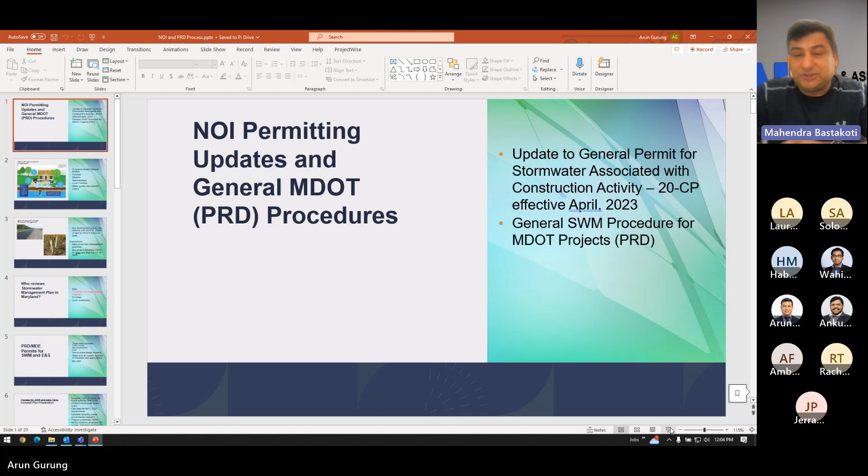This presentation is for the water resources NOI permitting. They have a new process launched. So we ourselves in WRE and also related other task force need to be aware of this. That's why we have this session. So Ankur and Arun, go ahead and start the presentation, please.

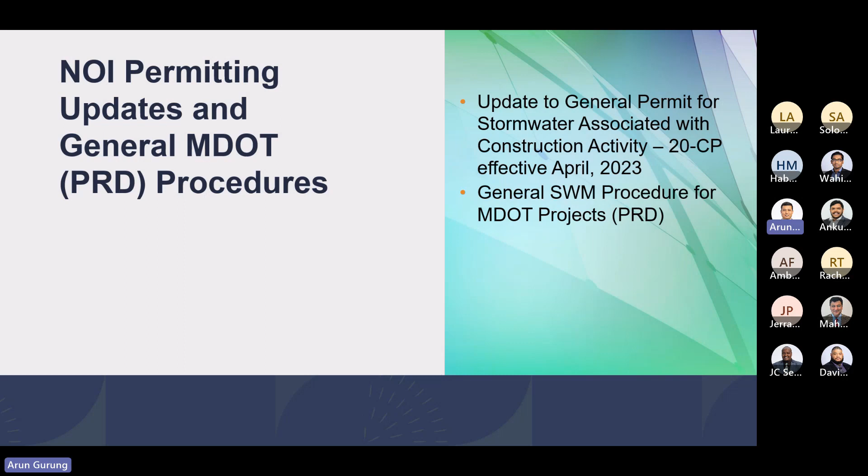So we are going to go over it, and then we'll be also going over some of the general stormwater management procedure, specifically for the MDOT projects, talking about PRD and HHD processes. We try to make it as simple as possible, so that we don't go too deep into the technical details, so that it will be easy for everybody to understand. So let's begin the training. Feel free to jump in whenever you want, or if you think I missed anything. Yeah, just chime in.

So let's say stormwater. So why do we need stormwater management? Why can't we just let everything fall to a river or lake? That's a very easy question, because as you develop a site, you're adding a lot of impervious area. And with the impervious area, there are a lot of pollutants that come with it. For example, a roadway project. When you add a roadway, what happens? There are vehicles that travel along that roadway which have contaminants like an oil leak or your gasoline, even the rubber from the tires of the vehicle. Those are all kinds of contaminants.

When you develop a site that deals with a lot of chemicals, then there will be chemical contaminants that will be coming out from that site. A typical example would be a dyeing industry where you dye clothes, or any manufacturing industry such as the pesticide manufacturing industry. So those are all pollutants that eventually run off to our watershed and wreak havoc.

Like if you have heard about algae bloom, which I think is a very serious problem in Chesapeake Bay, that's all due to the fertilizers that are being run off from the agricultural field, which end up in our storm drain system and eventually wash out to the bay, where it's feeding all the algae, and with all that nutrients added to it, the algae bloom, it's creating a lack of oxygen in the bay area that's killing all the native fish and species.

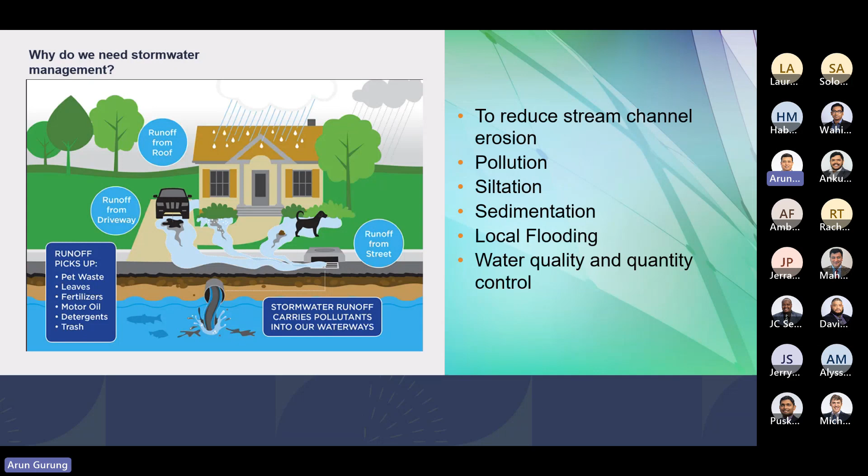So those are some typical examples why we need stormwater management. And with every new development, I think now pretty much all the jurisdictions are pushing for this kind of management. So when do we need to provide stormwater management? Generally speaking, any kind of land development that has disturbance over 5,000 square feet requires stormwater management treatment.

Not all developments are classified as disturbance. For example, if you are ripping out the top layer of your road, a mill and overlay typically, you're only ripping out the top 2 inches of the road and putting the same surface back. So that's typically not considered a disturbance, unless you do a full depth pavement where you're disturbing the subbase; then that would be considered a limit of disturbance.

So whenever the limit of disturbance gets above 5,000 square feet, or in terms of erosion sediment control, whenever you're removing 100 cubic yards of dirt from your site, then you are supposed to provide some sort of management or some sort of erosion sediment control. But there are exclusions.

For example, agricultural activity: when you're plowing your fields to grow crops, you are disturbing the earth, but that's not considered for stormwater management. Or certain activities in agricultural sectors, such as building a pond to irrigate crops on your farm, I think that activity is also exempted from the stormwater management treatment requirements. Anything other than that, most of the time, we do have to provide stormwater management.

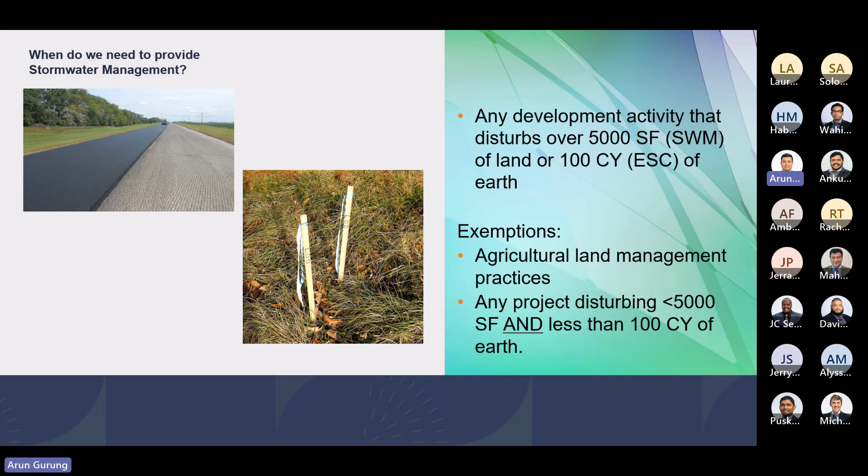So in Maryland, your stormwater management plans and erosion sediment control plans are generally reviewed by these four entities. Federal projects or any projects that deal with the critical areas or floodplains environmental impacts will be reviewed by MDE. All our state highway projects, I believe, are mostly reviewed by PRD and HHD. PRD reviews mostly the stormwater management and erosion sediment control, and HHD is more concerned about the drainage part of that development.

There are counties who enforce their own stormwater management guidelines. So if it's not an SHA project, or if it's a project jointly done by the county and SHA, then such projects will most probably be reviewed by both, mostly counties. And then there are cities which have their own guidelines, for example, the city of Rockville in Montgomery County, the city of Gaithersburg, and I think the city of Kensington or Takoma Park also have their own review department, but I may be wrong in the case of Takoma Park. So they also review their own stormwater management plans.

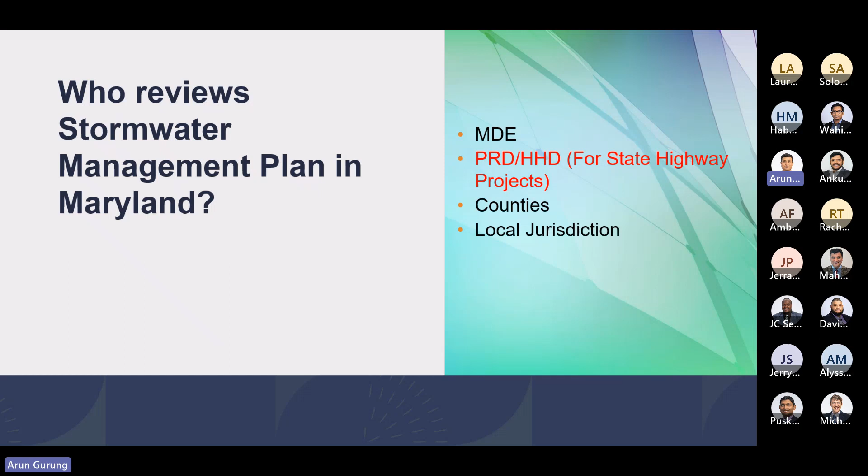And for today's presentation, we are going to focus on the HHD and PRD process. Some of you may be well aware of this, but for some, this might be a new thing. PRD is divided into a three-step process. Whenever you get a project and start working on it, the project goes through a concept phase where you get together with the project manager at the DOT and discuss the project, what improvements you're doing,

and based on that, you do a preliminary design investigation of the project where you can provide some stormwater management facilities. You collect information about the utilities and other constraints that might impact your design. Also, you might want to find out if there is any newer version of the application form, because I find that it gets updated from time to time. So any checklist that might be relevant to your projects, you might want to get hold of those too.

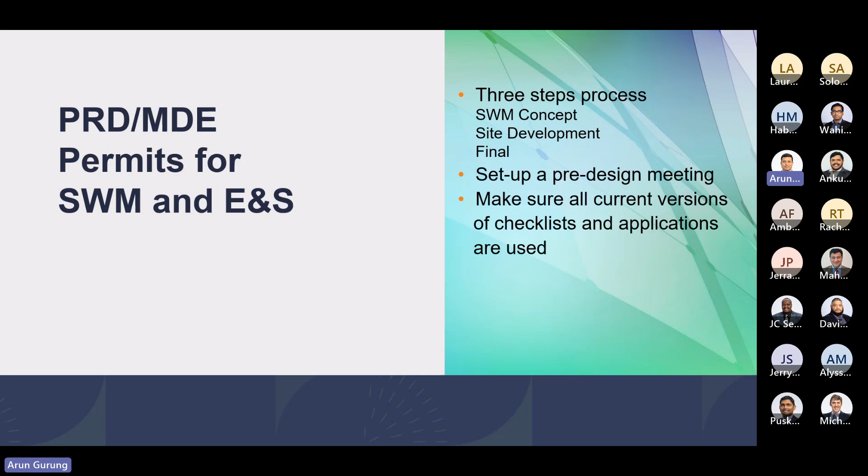So in concept plan preparation, in our water resource department, we go through these steps. First of all, you look at your project and you look at the limit of disturbance. And based on your limit of disturbance, you have to identify the point of investigation. If it's a concentrated flow that's leaving your site, which is generally SHA right of way or LOD, or if it's a sheet flow that's leaving your site, you would consider that as a line of investigation.

So you identify those points, and depending on your project, it might be only a few of them, or if it's a linear project, you generally end up with a lot of POIs and LOIs. And one thing that we need to make sure is your LOI or your POI includes the entire LOD. No LODs left without being analyzed at the end of the project.

Then based on that, for each POI and LOI, you calculate your IART, which stands for impervious area requiring treatment. Now, that is based on the category of your project, and we're gonna touch on that later, how a project is categorized. So your IART depends on if it's a new development or a redevelopment. It could also be combined development. So that will determine how much IART you would have in that project. And you would also calculate your ESDv based on the IART within that LOD.

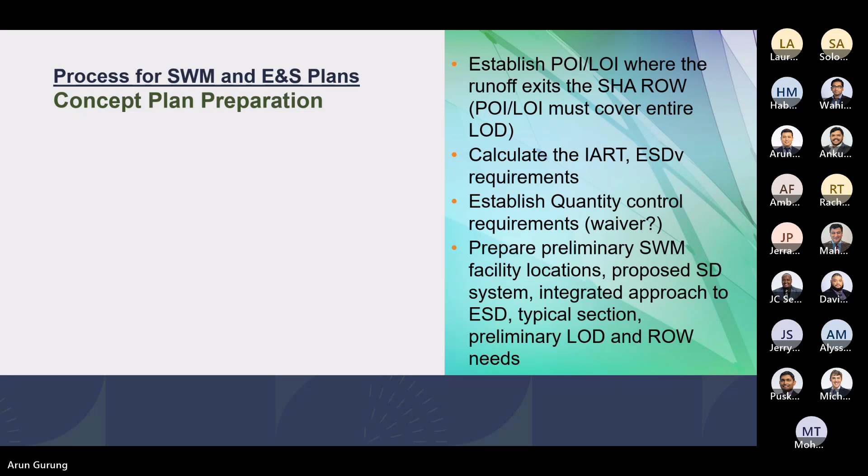And a few documents that we provide for the concept plan include the environmental resources inventory mapping, where we identify features in the site that are environmentally sensitive. Those could be forested areas or wetlands, your streams, steep slopes, your karst topography if you're working in Frederick or Washington County, any floodplains, tidal wetlands. Those kinds of features have to be identified, and that's generally shown in our environmental resources map.

Also, determine if any development in your project needs to be reviewed by MDE, because there's an MDE Pond 378 code that requires you to look at certain things in a stormwater management facility. If it exceeds certain things, then it needs to go through that review process. So you need to determine if your site has to go through it, because that's a lengthy process.

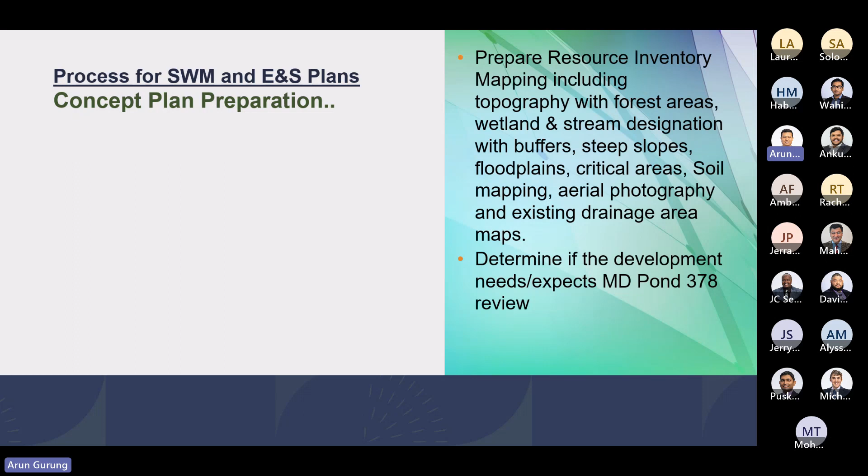So it's best if it's identified during the initial stage of your project. And we include all the drainage area maps, so that includes your existing condition, your proposed condition, all the runoff, that's pre and post runoff, those are computed, and all your ESD requirement, like how much is required, how much you have provided in your project, how much IART is required, and how much IART you have provided.

So those are all gathered, calculated, and then we compile a report based on our computations and our findings. We also put together a concept plan that shows the preliminary location of these facilities. And there are other forms and waivers, for example, if there's a POI and you're not meeting the stormwater management requirement, the IART or ESD in that POI, then you have two options, basically.

So you can either provide the same amount of treatment in some other POI, but there are also two parts to that. For your water quality, which is your first flush, they say it's the first 1 inch of rainfall that has the most pollutant, it has to be provided within the same POI, and the remaining up to the 1-year, 24-hour rainfall, which for most of the county is 2.6 inches, can be provided within the same watershed, but it doesn't have to be within the same POI.

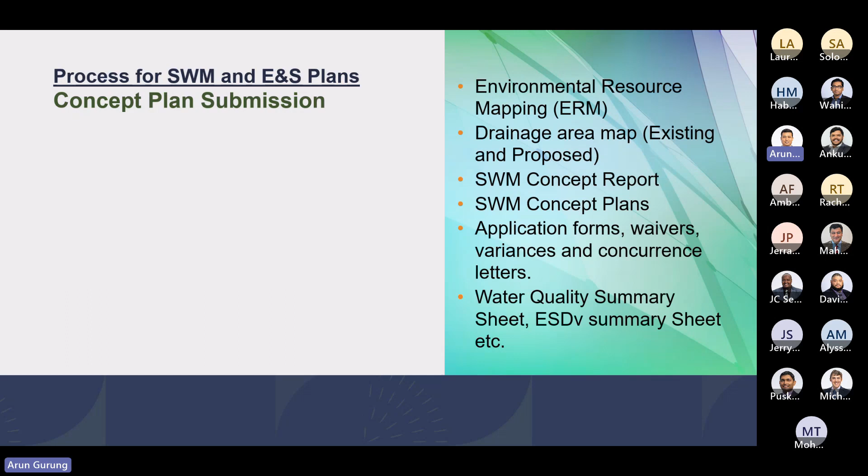Also, there are other sheets like the ESD summary sheet. I didn't even list a few of them, because if your impervious area gets transferred between POIs, then there is another spreadsheet that we fill out. So those kinds of documentation we include in our report, and that's the conceptual plan that we submit. Once the concept plan is submitted, it goes through review by PRD and HHD. Usually PRD reviews the stormwater management and erosion sediment control portion, and HHD reviews the drainage part of it.

Once we address all those comments and the concept is approved, then we go to the site development phase. In this phase, we generally address any remaining comments from the concept phase, and if there are any conditions in the approval letter, then we address those conditions. We also develop the full design detail. For example, if you're putting in microbioretention, then we provide all the typical sections, profiles, all the inverts. If you're putting in a bioswale, then the profile of the bioswale. So we try to provide everything in detail during the site development phase.

If there are any concurrence letters or variances that need to be signed by the county or HHD, then those need to be signed. In concept, we generally only include the general notes and a few typical details for the erosion sediment control plan. But during the site development phase, we do the full design of the E&S plan, so that also gets reviewed. If there is any MOT, then our highway team develops MOT plans for that. And if your project has to go through the MDE pond review, then this is the stage where we get those done.

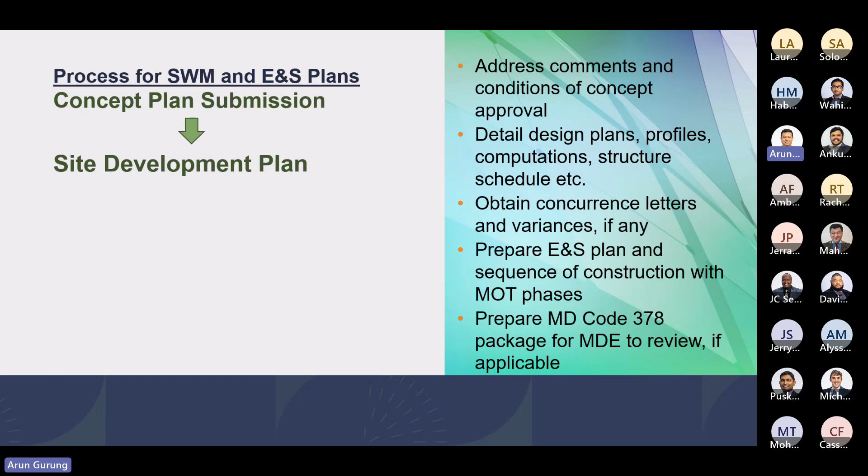So once the site development phase is completed, then basically the only thing you are doing is addressing the last remaining comments that PRD or HHD may have, and then you provide them with all the construction tables, schedules, any specifications or cost estimates.

Your project might also go through the constructability review from the SHA department. So they might also have some comments, so you would address those comments during this stage. And any dam safety or pond review comments that MDE might have, you'd have to address by this stage. Any signatures that are required on the plans, certifications, concurrence letters, water quality summary sheet, those have to be completed before your final plan can be approved.

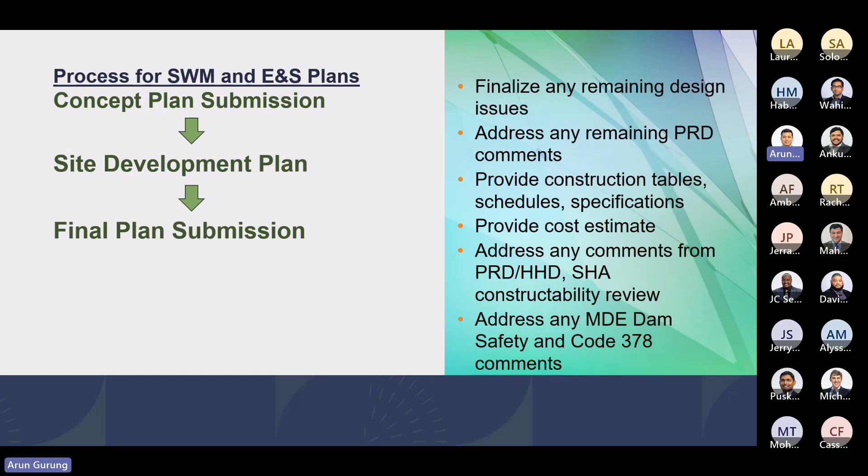So any questions so far on the stormwater management before we begin the NOI?

I just want to clarify about the size of the disturbance. Yes, go ahead. 5,000 square feet. Can you hear him? Solomon, I think your microphone's really low. Okay. How about now? Can you hear me? Yeah, it's better now. Go ahead.

Yeah, I was trying to clarify. I don't know about PRD, but at MDE, if the size of the LOD is greater than 5,000 square feet, both stormwater management and erosion and sediment control are required. If it is less than 5,000, the stormwater management requirement automatically disappears, but for erosion and sediment control, 100 cubic yards is the threshold. So is that the same thing for PRD? Yeah, that is the same thing for PRD, Solomon.

And also, I'd like to quickly input here: what is the difference between SHA review and MDE review? They are similar because all state and federal funded projects need to be reviewed by the state agency, which is MDE. But SHA worked out with MDE to get a general permit. There is an agreement between SHA and MDE for the general permit so that SHA can review their own projects, but they need to be documented and submitted to MDE. A yearly audit from MDE happens on those projects.

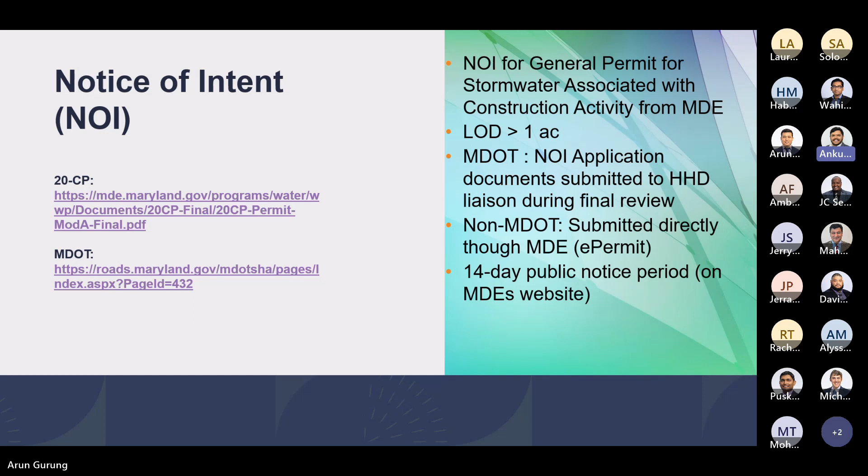You can go to the next slide.

So one of the big changes with the latest law, the 20 CP requirements, is this stormwater pollution prevention plan. So essentially all that is a document. It's a Word document template they have. MDE has a long version of it that includes every stipulation of any type of project. I think it's available on MDE's website. If someone needs it, I can link you to it, but it's something like 50 pages long.

Whereas MDOT just released, as of middle of June I think, their own template version, which is much shorter, I think just 6 pages or so. And it goes hand in hand with the new E&S general note sheets that MDOT also published. If you read through it, a lot of those notes are related to environmental things. So instead of having to repeat the information within this SWPPP on every project, they incorporated those notes into the E&S general notes. That's what allowed them to reduce that document from like 50 pages to 7 pages.

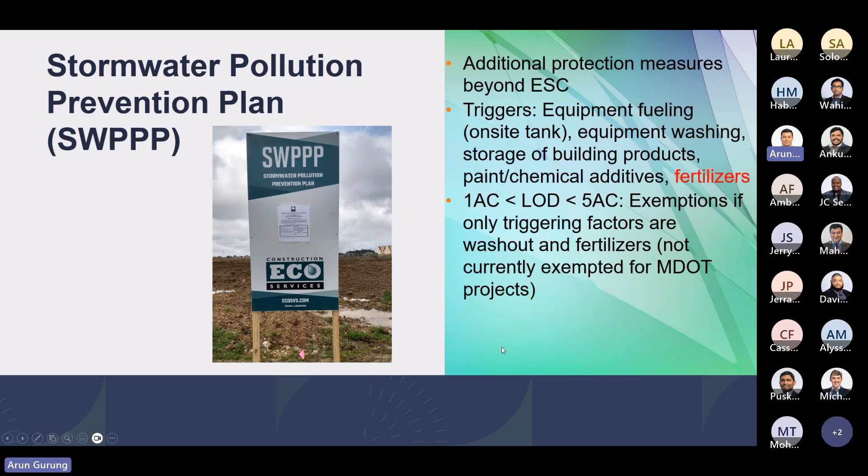No. In that case, we're gonna go through some slides where we will talk about some general terms used in stormwater management. Most people who deal with stormwater management know these terms, but they might be new for some folks. So we're gonna go over it, and hopefully by the end of this training you'd have some idea about it. Like I previously mentioned, when you start a project, your project is typically categorized into 3 categories: redevelopment, new development, and a combination of both.

So what triggers that is, if you have a site and you have a LOD, and if the existing impervious area in that LOD is greater than 40%, and you're not increasing the net impervious area at the end of your project, then such a project is typically called redevelopment.

Whereas any development that has an existing impervious area equal to or less than 40% is categorized under new development. And the combination is when you have existing impervious area that's greater than 40%, but at the same time you're increasing the net impervious area at the end of the project; then that kind of project is categorized under combined redevelopment and new development.

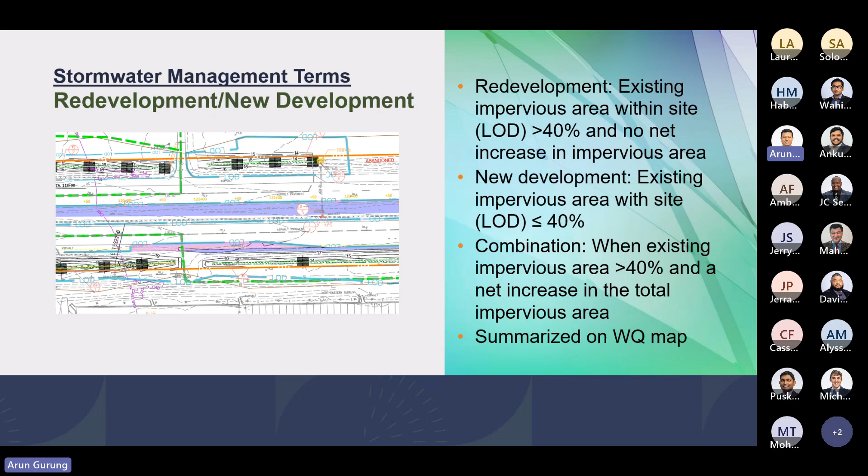And also the general spreadsheet that we use to calculate our stormwater management will have your new impervious area and existing impervious area. So this is how we generally categorize our development, and based on that, they have different requirements for stormwater management.

For example, if you're developing a site that can be categorized under redevelopment, then you can satisfy the stormwater management by reducing your existing impervious area by 50%. If you're removing an old parking lot, let's say, and putting just a playground area without any impervious surface, you're basically removing 50%, just for an example, then you have satisfied your stormwater management. Or you can provide treatment for 50% of the existing impervious area within that LOD. If you provide that 50% treatment, then you have satisfied the stormwater management for that development.

For any new development... Arun, for that 50%, you need only to treat one inch, right? Yes. Okay. So when we say water quality, we are talking about the 1-inch PE. Anything above that, up to 2.6 inches, that's CPV. We can touch base on that later, but I'm talking about the water quality here.

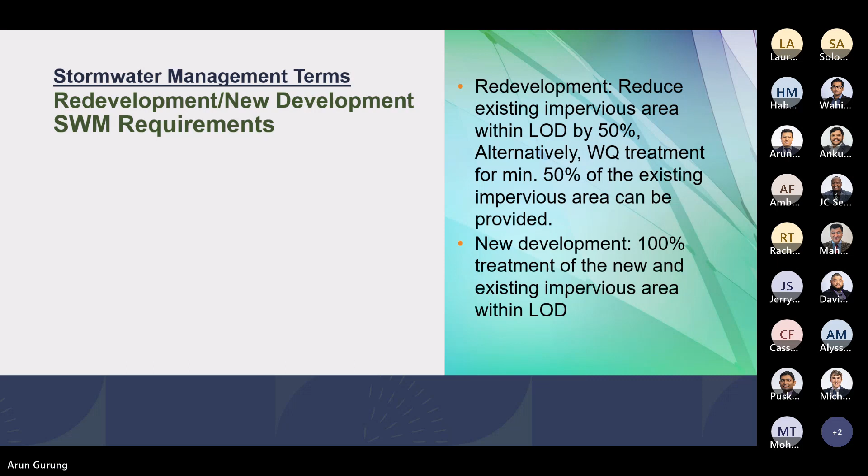A few other things that come up during our discussion, which might be confusing, is water quality volume. What is the water quality volume? This verbiage I took directly from the SHA manual. It says it's 90% of the annual runoff volume at the project site, the 90% of your 1-year, 24-hour rainfall event, which for Montgomery County, I think, is 2.6 inches. I think for PG County it's 2.7 inches.

But the first 1 inch of that rainfall is considered the water quality volume, because that's the water that will contain the most pollutants, and that's why it needs to be treated with a stormwater management facility. It's recommended that those are treated by ESD facilities if possible. So that's called the water quality. Anything above that, up to 2.6 or 2.7 inches, is called the channel protection volume.

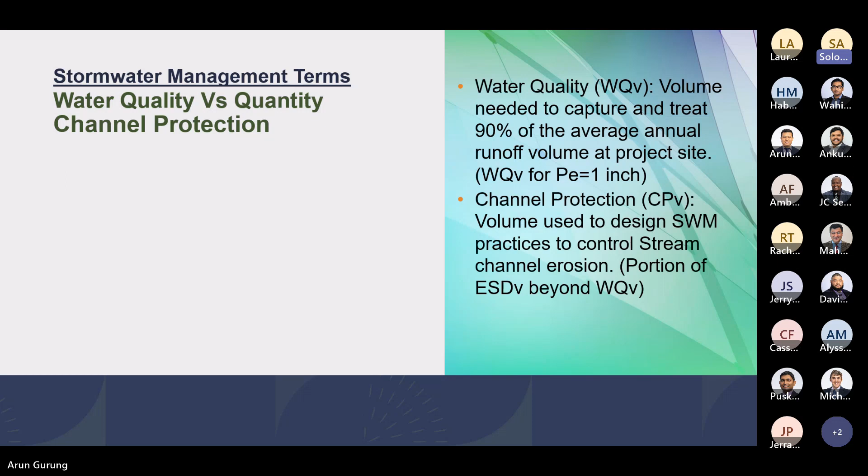Another term that gets thrown around all the time is water quantity control. So what's water quantity control? This has to do with the historical flooding issue that I mentioned before. Some jurisdictions have very serious issues with flooding, whereas some rural areas might not. So different jurisdictions have different requirements. As you go into the urban areas, they are having more and more problems with flooding, so they might have more stringent flood control requirements.

They might tell you to control your 2-year or 10-year, and obviously 100-year. But in some areas, like Garrett County or Washington County, they might only tell you to control your 100-year and sometimes 10-year. So those are usually based on where your site is located and the criteria set by that jurisdiction.

And the way we do the quantity control: once you have your ESD facilities, what you're basically doing is you're trying to mimic the natural, or you're trying to bring your site back to its original condition, like woods in good condition. That's what they say. So what you're trying to do here is provide enough opportunity for the water to get treated by infiltration before it runs down to the stream and causes problems later on.

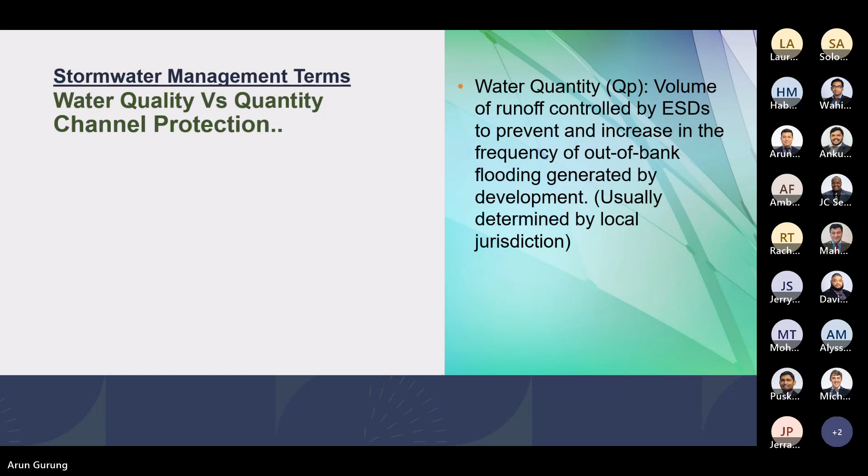You want to go through this, Ankur?

Yeah, a lot of people kind of interchange the words a little bit, but the word ESD, environmental site design, versus BMP, best management practice, technically come from the MDE stormwater management manual, which all stormwater management requirements are generally based on. And then PRD or different counties or whatever you're working in might have some additive items that make some aspects more stringent or less stringent based on their needs. But it's all based on that.

So chapter 3 of this manual is for BMP design. Those are larger scale facilities. Like Arun mentioned, they're ponds, sometimes underground storage structures, versus ESD are easier, you don't need as much room, and they're in general more aesthetic, right? Like microbioretentions, things in parking lots like this, or swales, just micro scale facilities. So they all have limitations based on drainage areas.

So ESD means essentially micro scale practice. Other than submerged gravel wetland, they all have drainage area limitations of an acre or less. So you can't have 10 acres of land drained to a microbioretention, because it's not going to function as it's intended to. So a lot of jurisdictions now really focus on what's called ESD to MEP, environmental site design to the maximum extent practicable.

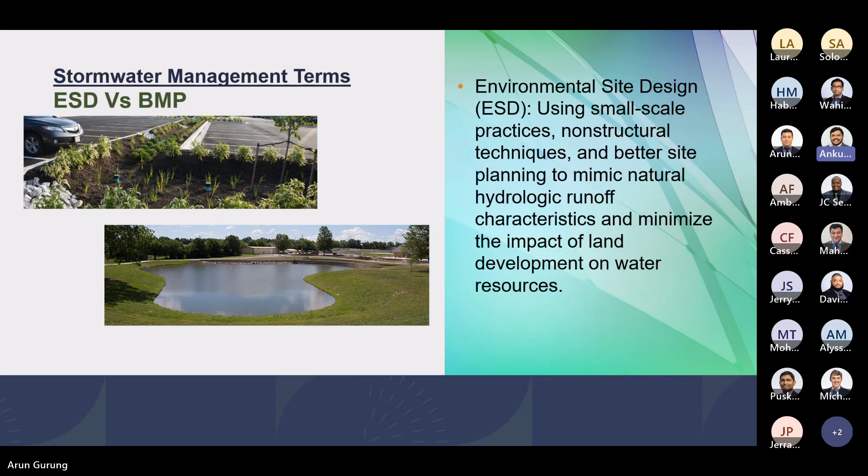So rather than putting one pond and having your whole site drain there, they really want you to have like 4 or 5 microbioretention facilities that overall will function similarly from a quality perspective, but provide more aesthetic design and environmental benefits. So that's kind of where stormwater management is right now. And I think the next slide is similar, if you want to just go to that.

This is another way to do it, but again, you have to exhaust all your options to provide smaller scale facilities before jurisdictions will usually let you do something like this.

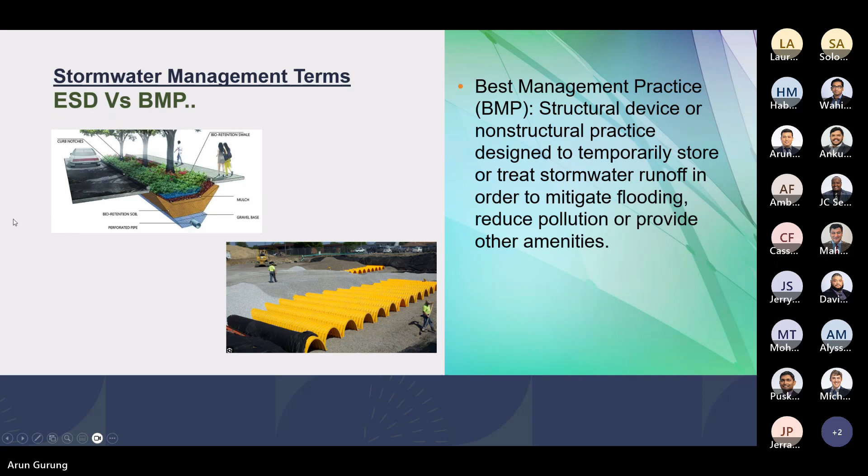I can do this one too. So there's a lot of confusion about waivers, variances, county concurrence. You might see these in our stormwater management report, or you might see comments on them. Different jurisdictions have different ways of doing it, but for this one I'm going to focus on the Maryland MDOT procedures.

So there's a CPV variance, that's something you submit to PRD. CPV is channel protection volume. Not to get too technical, but water quality volume is the 1 inch PE, so it's treating the first 1 inch of rain that falls. Versus ESD volume is based on the soil conditions and stuff. Usually it's like 1.8 inches or 2 inches.

There's some table to calculate it, but if you can meet the water quality volume overall but you can't meet the CPV per POI, then there's a variance request letter that you have to address to PRD, essentially saying we can't meet the requirements of the stormwater management manual for this reason. Lately, a lot of reviewers are really making us spell it out, thoroughly investigate and prove that we can't put more facilities somewhere. So it's getting more and more stringent. It's something you need to start at concept, but it needs to be approved before final approval.